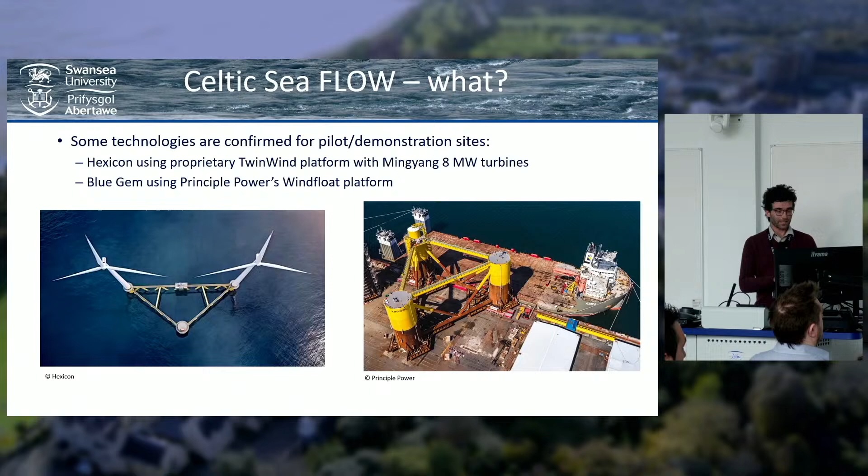However, most developers haven't confirmed their technology, with some caveats about levels of confirmation. In many cases, they likely haven't even selected their platform or turbines, because the rate of development of these devices is very rapid, and people don't want to commit at this stage to something they'll be deploying in 10 years' time. However, roughly we can say the expected capacity will be turbines between 15 and 20 megawatts, of a max height of around 300 meters with a hub height of 150 to 180, and a platform width of about 50 meters.

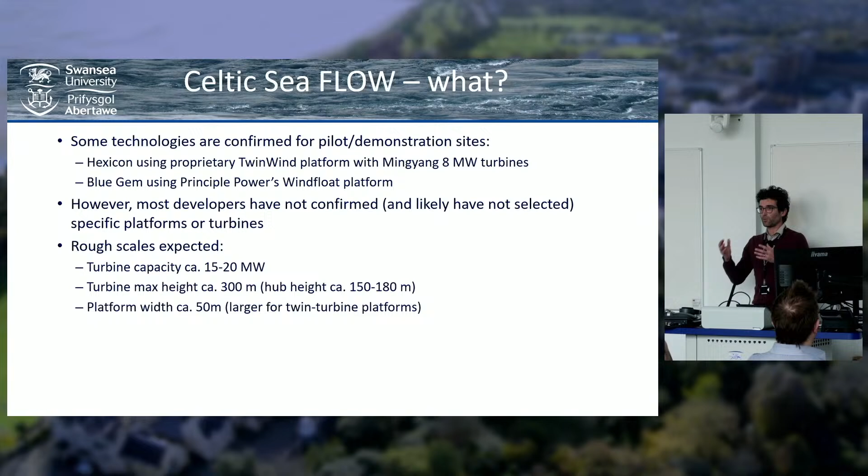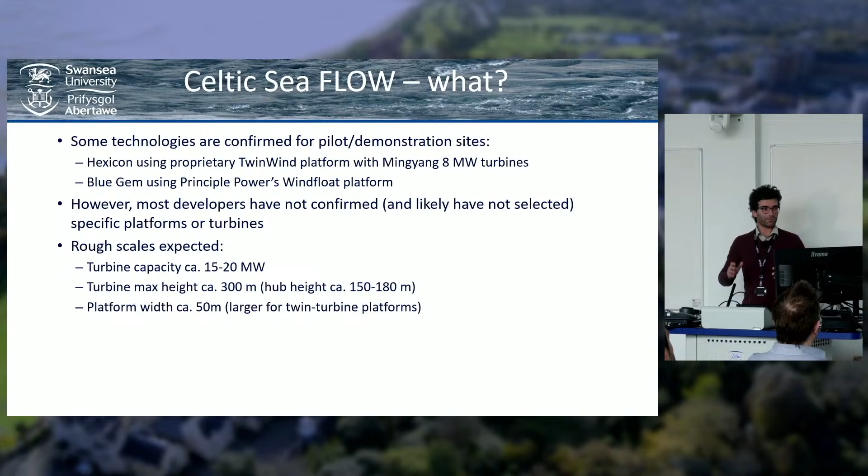The example that always springs to mind, given by RWE, is that it's the equivalent of building an Eiffel Tower on top of a Principality Stadium and floating it out to sea once a week for 5 years.

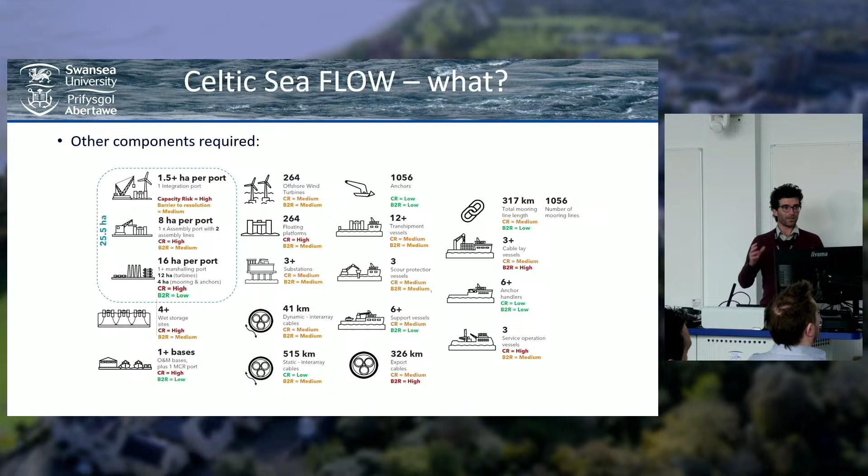Beyond the turbines and the platforms, there's lots of other components that are needed. Obviously the port facilities, storage facilities, the vessels, the cables, the anchors, the substations. So it's not just a matter of the big metal bits - there's lots of string that goes between them, and lots of places to store them when you're getting ready to tow them out.

How is it being supported? It's not expected they'll be able to sell at market parity, so they will be supported through probably the Contract for Difference scheme. I'll have to wrap this up now, apologies. Hexicon has already secured CfD funding, Contract for Difference funding, in 2022. No one else has yet.

However, we're expected to get more in the 2025 rounds. The 2025 rounds do include clean industry bonuses, which means the people awarded CFD will need to show engagement with local supply chains and more sustainable manufacture. I've mentioned the port facilities are going to need to be improved, and that's had some support - not just in the UK, but also in Ireland. So we're looking at South Wales, obviously, because that's where we are, but there might also be ports in southwest England and ports in Ireland, which might be the basis for some of this work.

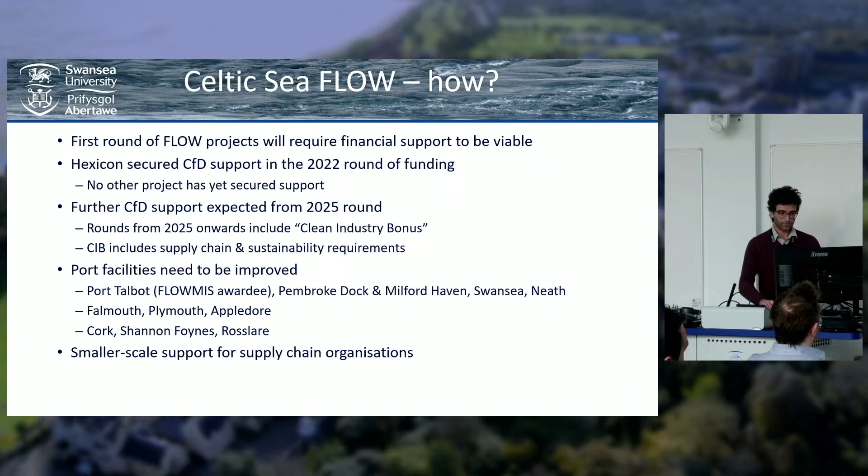And then we will return to the agenda because I've slightly overrun. Thank you very much.

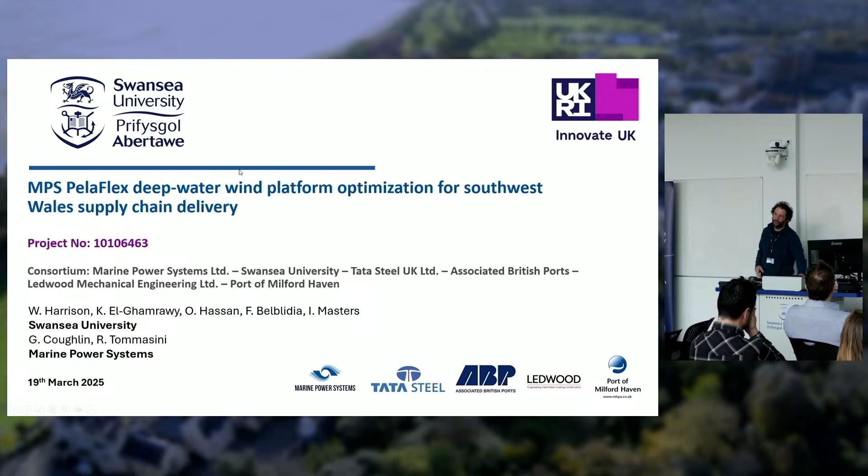Okay, thanks, Ian. So what I'm going to talk about today is a current Innovate UK project. This is a collaboration led by Marine Power Systems. We've got a few people from Marine Power Systems here today, with multiple partners, including Swansea Uni. So we're taking one of the technologies, one of the platforms that Michael just showed, and we're looking at optimizing that. There's a list of contributors - we've got contributors from Swansea University and from Marine Power Systems.

So, as Ian said, these things are really big. It's got a sort of tetragonal structure here. Some of these tubes are sort of 9 meters in diameter, so big structures. They currently have...

We need them to be able to preferably be made in the local area. So this project started with an initial design from Marine Power Systems. It's like a tetragonal shape. It's got advantages over some semi-sub designs. It has a low mass per megawatt.

Lots of similar parts, so it's sort of easy to manufacture. It's all steel, so it's recyclable. It's a towable structure, so it can be towed out easily, and it's fairly stable as well. Obviously, the more stable it is, the more steady your turbine is, the more efficient it will be.

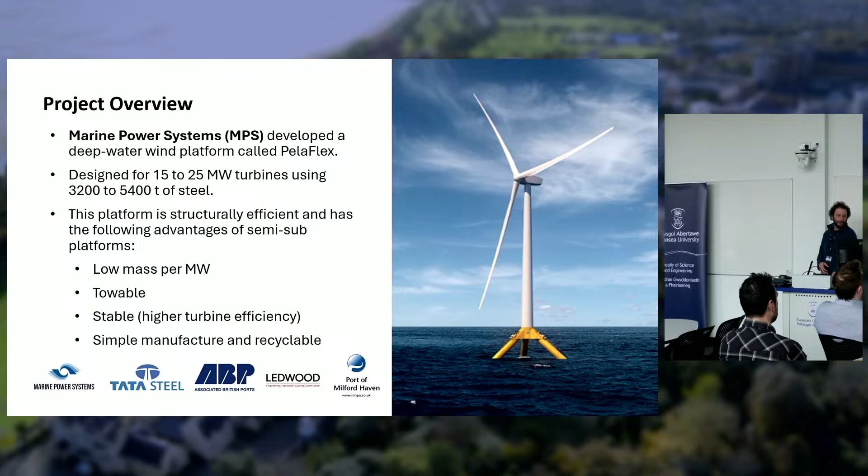So the problem with these structures is they're really big, but a lot of the steel in there is really thick. Tata, over in Port Talbot, can make steel sections up to about 20 mil. This has got sections way more than that, sort of 40 mil, 50 mil sections. So the idea of this project is, can we do some optimization of the design, reduce that section thickness down, make it so we can use the steel that we make in Southwest Wales, like over in Port Talbot.

If we're going to thicker sections, we're taking steel from somewhere like IJmuiden. If you're taking it from IJmuiden over in Holland, you might as well just make the things there and ship them over here. We're not going to benefit Southwest Wales.

This project is, like I said, a collaboration between Marine Power Systems and some partners. We've got Tata Steel, Associated British Ports, Ledwood for the manufacturing side, and Port of Milford Haven as well. One of the other advantages of this design is it's got lots of similar components in it, so it makes the assembly a little bit easier. You've just got multiple of the same part.

Okay, so I'm going to be talking about the design. Obviously, we want to optimize the design, so we need to go through the process. This is maybe targeted a little bit more for some of the academics here, what we're doing here. So first of all, we need to work out what the loads are on these structures.

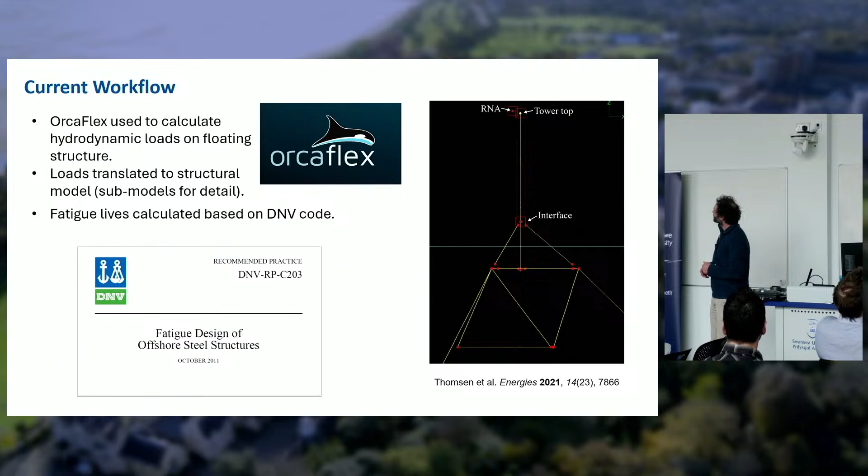We do a hydrodynamics model, we use Orcaflex for that. Those loads need to be then transferred to a structural model, so then we can calculate what the load cycles are and the fatigue life. These structures are going to be dominated by fatigue loading, and fatigue life is going to be our dominant factor there. And there's a code for offshore structures that we follow for that.

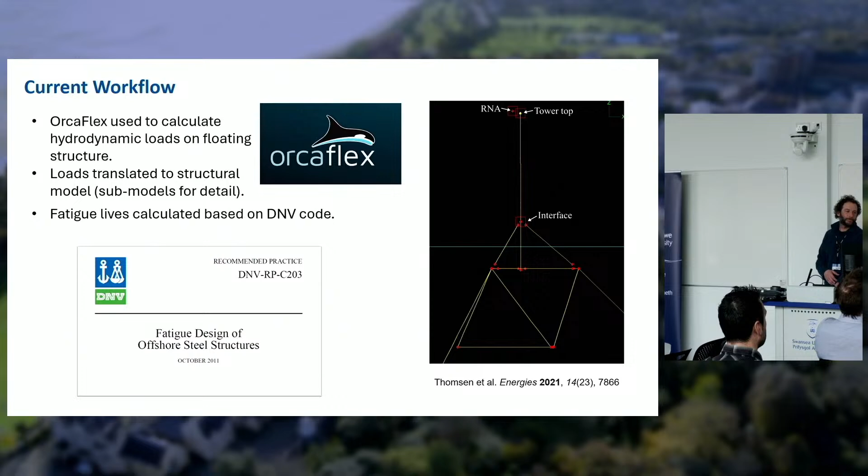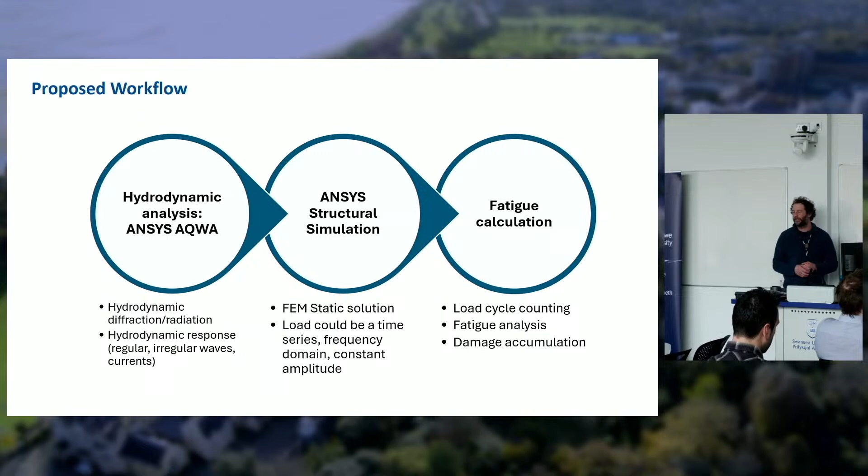So within the project, Swansea University's aim was to change the workflow. I'll suggest an alternative workflow we can use. Using the ANSYS environment, we can do the hydrodynamics in ANSYS AQWA. And then within the same environment, transfer the loads to structural analysis, and then we'd also do fatigue calculations as well, so accumulation of damage for the wave cycles.

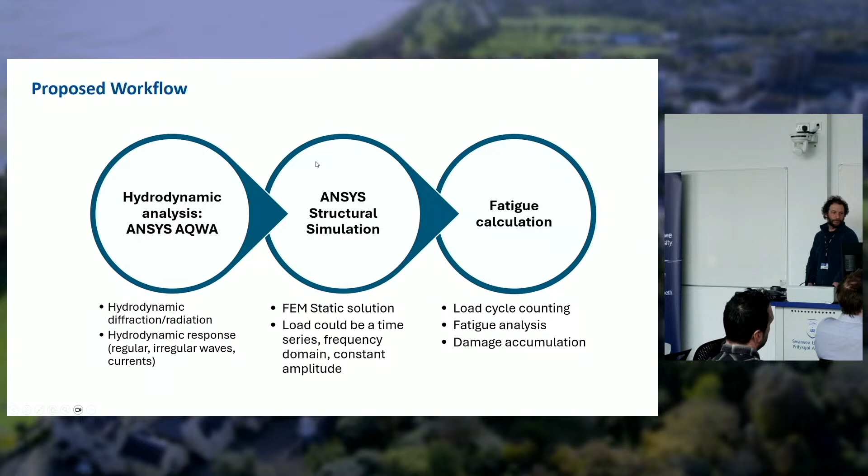And this is just an example of the workflow. I think some of the academics here will have used Workbench. So here, within the same workflow, we have the initial CAD model. Then we do some different load cases, and I'll talk about this.

So this is different wave conditions. Obviously, in the offshore environment, the sea conditions are never the same two days in a row, so we've got to have lots of different load cycles, wave conditions. Transfer those, then we're going to calculate the stress ranges for those load cycles, and then we can calculate fatigue lives. So this is basically for 6 different sea states.

So the advantage of bringing it all into one workflow is that we can help with the optimization. Change, for example, the CAD model at the beginning, and we can bring it all the way through and calculate fatigue life in one process.

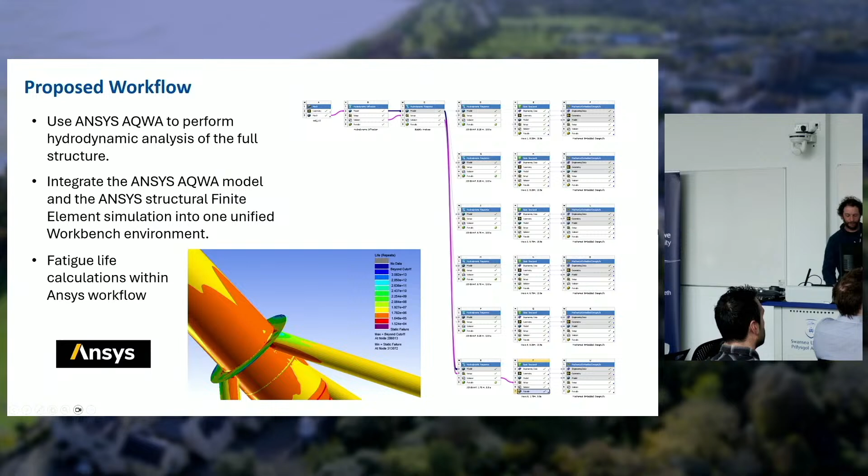All right, there's lots of challenges to doing this. For those of you who aren't familiar with offshore structures, obviously you've got to consider the waves, regular versus irregular waves. You've got all the hydrodynamic forces on a structure. You've got to transfer those loads from a hydrodynamic model to a structural model to calculate your stresses. Another challenge in this project is just getting a suitable CAD model to do the analysis in the first place.

Different constraints and contacts - you've got contact between parts, whether they're welded or however they're attached. Constraints such as: it's a floating structure, it's free to move, so you need to have a model constrained somehow. So for constraint methods, we use a 3-2-1 method.

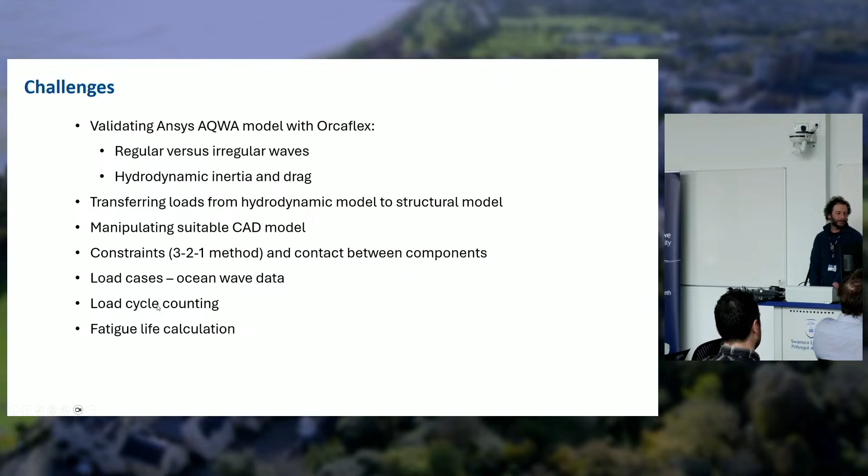I can talk a little bit more about load cases in a moment. Obviously, the sea is different all the time, so we can have lots of different wave conditions, with irregular cycles, so load cycle counting for our fatigue calcs is a challenge. And that leads us on to fatigue life calcs.

So we need some way of sampling this data to get a representation so we can get an accurate life for a structure without having to run every single possible wave state.

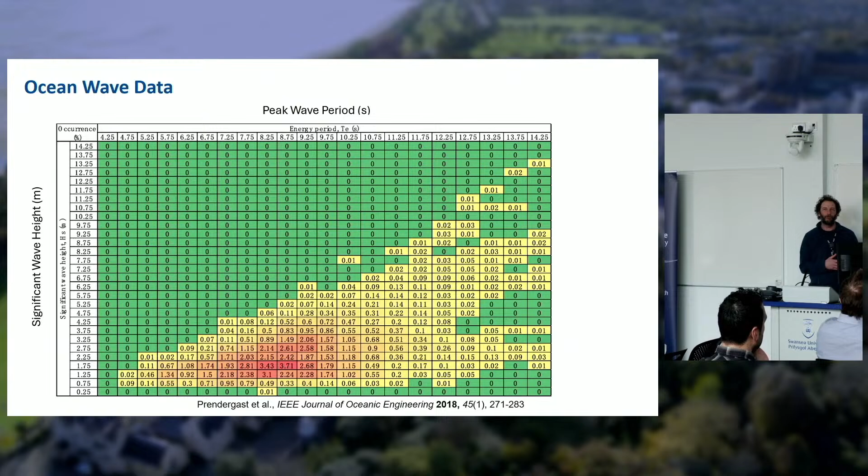Obviously within this as well, we've got wave height and period, but also the angle of the wave is going to affect it, so you may have a range of wave angles as well. So you've got a couple of ways we can sort of cluster the data. We can do just some non-physics based approach, so here we've got a k-means clustering process.

So we've taken the whole spectrum of wave data using a k-means algorithm to just separate it up into different clusters. We then take the mean of each of these clusters, and then we can run points here - each of these would be 12 runs to represent all that data.

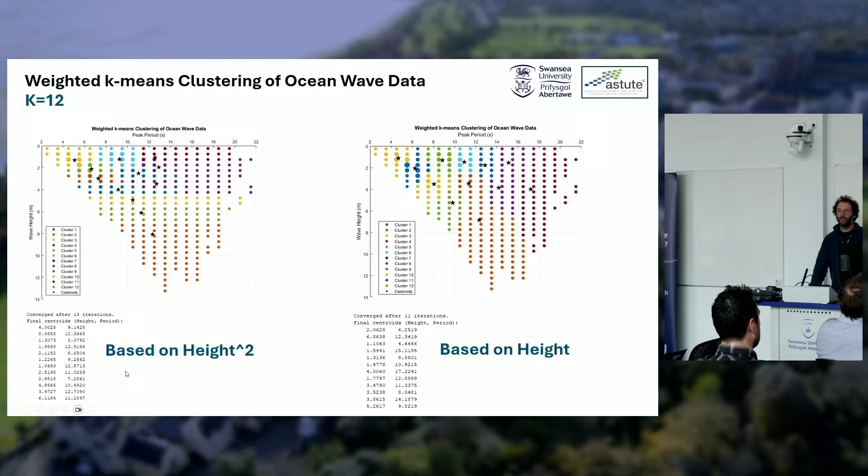We can do that based on height, or height squared we've got here, because wave power is dependent on height squared - significant wave height squared. So that's one possible way we've got to do this.

Another way is to take some points and find out really what's going on - more of a sampling based on understanding how wave height affects it. So we could do it almost like a response surface way through all the data, so we can sample all our different wave states that way.

So that's the challenge of looking at wave data. For those of you who do normal engineering, not offshore engineering, your load cases are nicely defined normally - you'll have a frequency and a stress range. Here we've got all sorts of frequencies and all sorts of stress ranges.

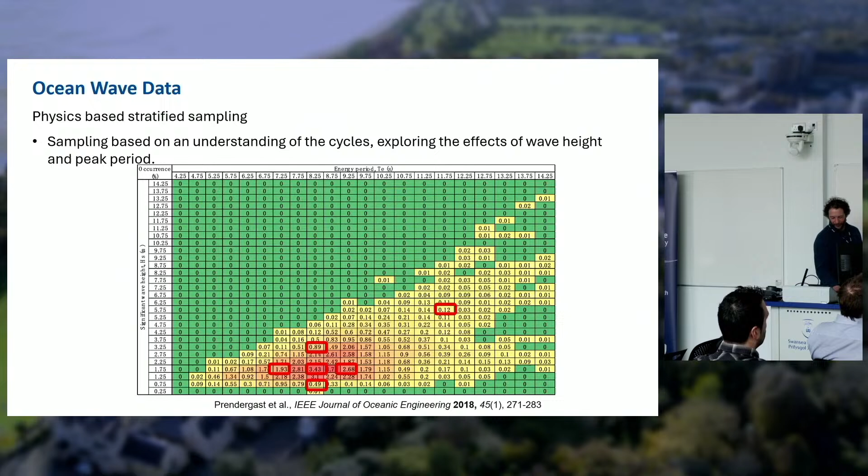We have a code to work from, so when we do our calcs there's all sorts of considerations - I'll go into a bit of detail here. Things like SN curves for our fatigue life for steel. This is steel in salt water with cathodic protection, and we've got within the code how to account for stress concentration factors, how to account for welds, how to account for mean stress effects.

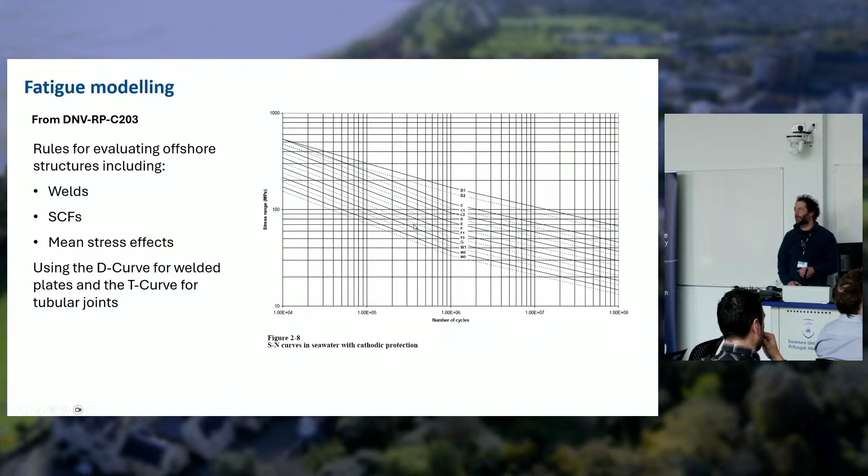So we have SN curves we can work from, but the challenge now is how we count our cycles. The SN curves will give us a life for a given stress range, but we've got wave conditions, and waves are irregular, so we don't have a nice cycle to count. So we take our hydrodynamic response, we then work out our static structural stresses, and for each point we'll have a nice cycle, but it's not going to be regular.

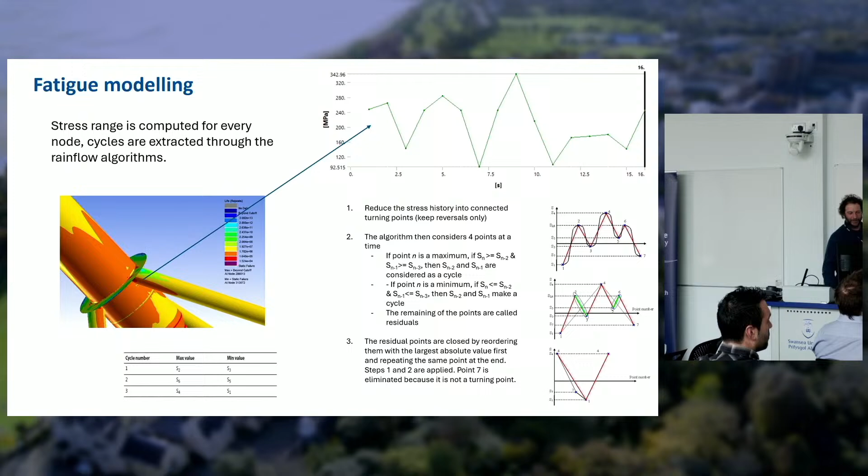We've got a nice irregular structure there. So we do some what we call rain flow counting, so we can count our cycles that way. But each cycle is going to have a different stress range, so that makes fatigue life calculations a little bit challenging, and what you end up with is something more like this.

So then we use that - we can evaluate our fatigue lives for these points and then work out our damage. And then we sum our damage together, with a Miner's rule.

So yeah, lots of challenges to evaluating offshore structures. Hopefully that gives you a bit of a guide of what we're looking at. I hope I kept to time there. So a bit of a summary: yes, there's lots of challenges to modelling an offshore environment.

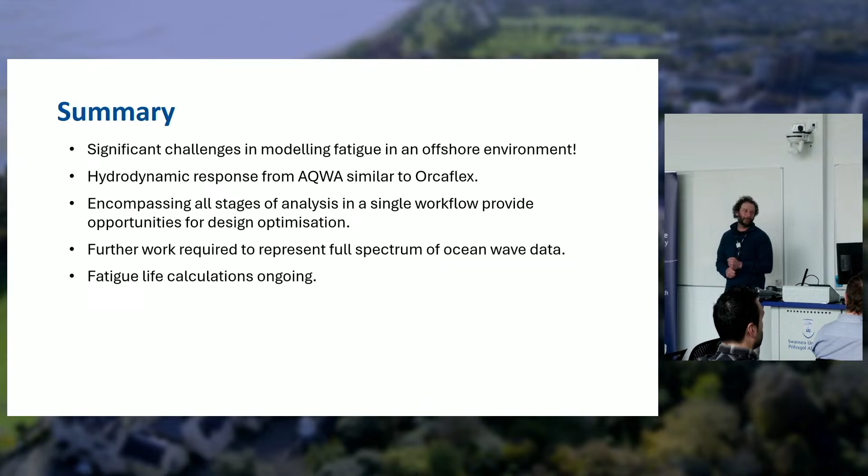We've done some work and we can get ANSYS AQWA to produce similar results to Orcaflex, which is an industrial standard. And other work I presented is ongoing at the moment. Anyone any questions?

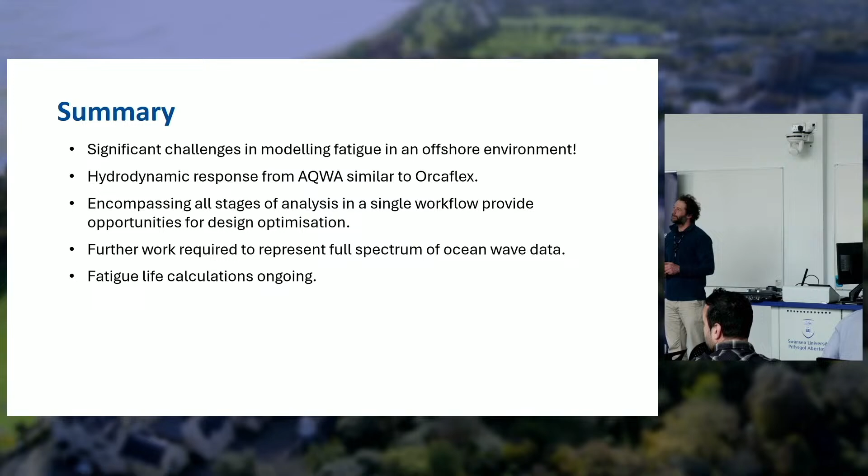Yes, Paul. Can I ask, it might be a very beginner's question - the idea of the turbine is that it also takes energy from the wind. Is that insignificant compared to the energy in the waves and the period of the waves? Or do you have to think about it if it's turning a lot when you're doing this stuff? No, there is a drag on it. So obviously, apart from that, it's considered, but it doesn't go into the fatigue calc. So the inertia of it is there in the structure moving in the sea, but that's it.

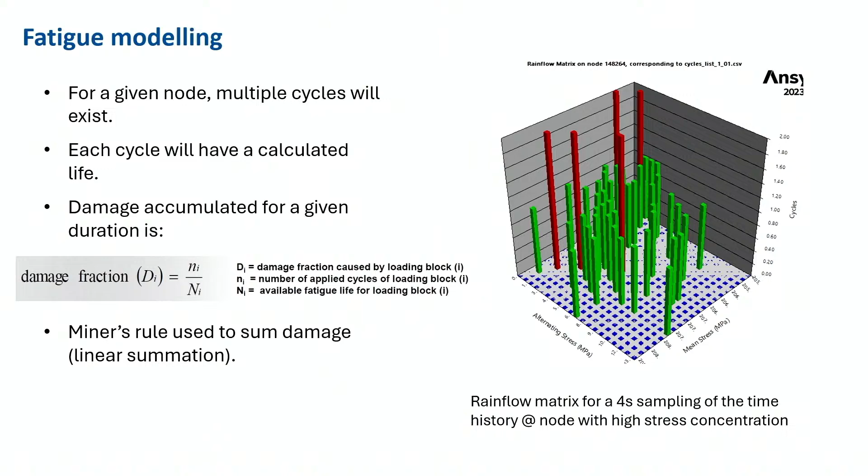Okay, so we've gone from one very technical thing to now a broad overview. Dawn, if you want to come up and talk to us. Dawn and Larry, who've organised today, so thanks to them for doing all the organisation and the logistics, have been talking to a number of companies locally, and Dawn is going to summarise what they've been up to. So you need to read that.

I thought he was going to say we've moved from one very technical thing to one not very technical thing, but we'll ignore that implication. So we've been working for the last 15 months on this project called NPT-FLOWRD. Michael's leading it, and Larry and I are the researchers on the project. Basically what we have tried to do is engage with companies in Neath Port Talbot to see opportunities in the supply chain for floating wind, for the floating wind sector. So this is the sort of remit of the funding that we had - we had a year's worth of money coming down from the government through Neath Port Talbot, through the Levelling Up funds.

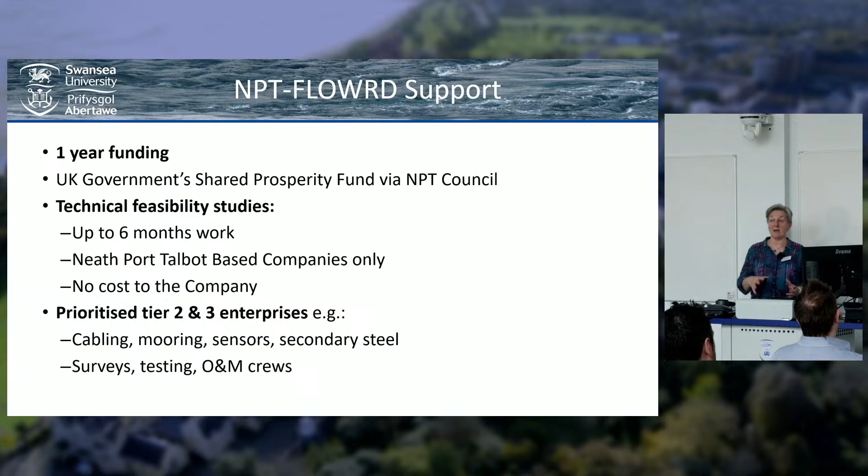And what we were offering to companies is technical feasibility studies at no cost to the company, where we would say, okay, we can do some work for you, between about a month or six months of work, looking to see where there are opportunities, particularly relating to your sector. Neath Port Talbot business unit were dealing with the metal bashers, and we were looking at the sort of second and third tier companies who would be able to engage in ancillary equipment and other areas relating to the sector.

So what were we actually doing? Hunting around really and drawing together information from all sorts of sources. There's a lot of stuff out there, but mostly small businesses haven't got time to delve around in what's available. So Michael's mentioned the Crown Estate - we had the opportunity to speak to CADU. There's the Offshore Renewables Catapult, and people are publishing reports - you've seen this table earlier, publishing reports about detailed requirements that are needed. And also some of the existing data that comes from wind farms that are under development, in this case Dogger Bank. And then, of course, we're involved in academics, so we're looking at published literature.

But this was all about searching websites and drawing that information together in a way that would be easily accessible for the companies. So we worked with 11 companies. I'm going to try and give you - I was thinking, oh, I'll only talk about the odd one or two. And then I'm like, oh, they're all so different.

I want to tell you what we've been up to. So I've sort of grouped them.

Here's a group of three companies who were particularly interested in who the developers are likely to be working in this area. We've got 9 Training, who do apprenticeship-type work, CAD, and management training, so very interested to see what opportunities may be there.

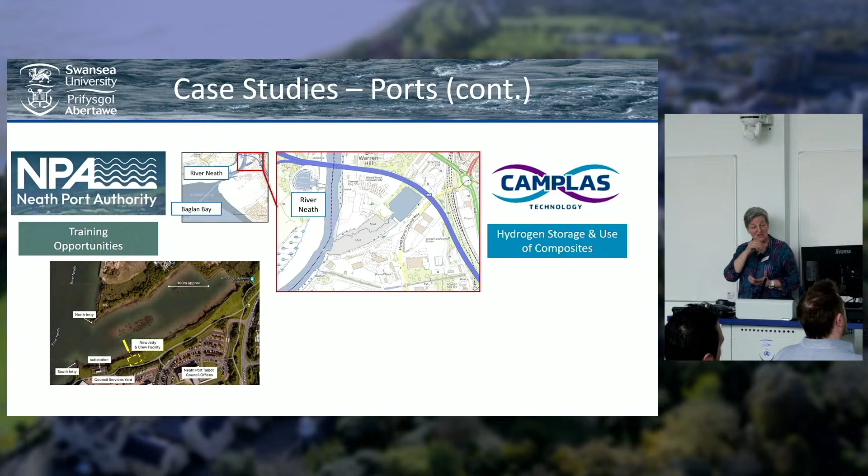So we worked with Neath Port Authority to look at a small port on the River Neath. It's disused now, has been since the 1960s. It's known as the Briton Ferry Dock or Brunel Dock, because the lock gates there were designed by Isambard Kingdom Brunel.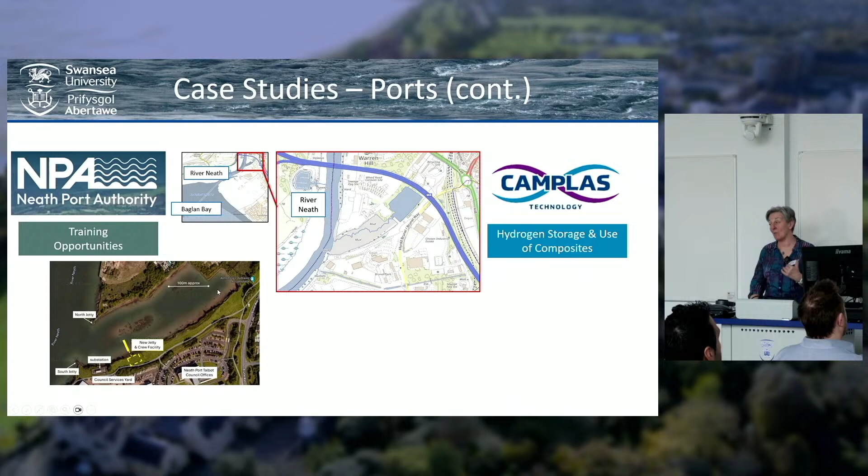If you're driving from the M4 coming towards Swansea and you look down, you can see it. We did some work looking at whether there were opportunities that could be developed, for instance, for crew transfer vessels.

But because it's got that link with Isambard Kingdom Brunel, it's got listed building status and scheduled monument status. So their technical feasibility study also included conversations with CADW about where the restrictions and opportunities might lie.

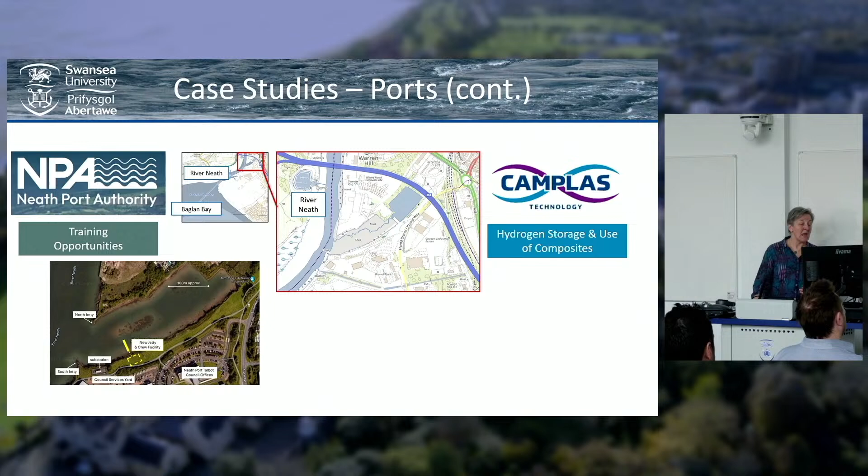Another company interested in the same area is Camplas Technology - they're a Bridgend-based company but have land located in this area at the moment. Their feasibility study was not only about how they might use their glass fibre storage tank manufacturing, but how they might use glass fibre in floating wind turbines. They had an interest in how towers have been built out of glass fibre, and also looked at hydrogen storage.

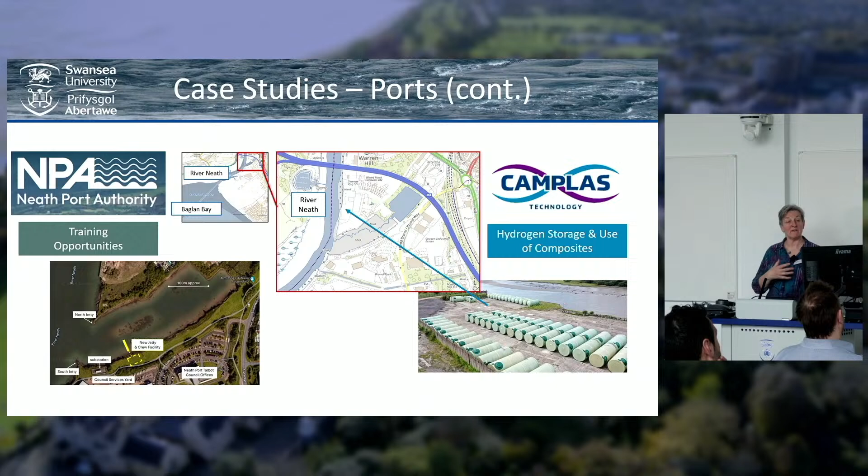As an aside, many of you will have heard of the Celtic Freeport, which enables the ports of Milford Haven and Port Talbot to have some tax and import exemptions. This area here, where Camplas has their location, has also been designated within that area for the Celtic Freeport. So it's very interesting to see how those things are moving along.

Lastly, these four companies - basically their focus was related to the turbines themselves. Talk to me later, I'll happily talk to you about toilets in turbines.

GenQuip produce welfare units - the sort of thing you'll see on building sites, with toilets, showers, canteens. Their technical feasibility study looked at how they might be able to use their experience for installations of toilets in towers, which we have seen done retrospectively in some locations.

The case study for Hexigone was slightly different, in that we were able to use other resources in the university, in the Welsh Centre for Printing and Coating, and they were able to look at the feasibility of a new corrosion inhibitor and whether there was an opportunity there.

CommSpec, I'll just quickly mention - I think they're a fine example of how we could do for them what they couldn't do for themselves. They're a sole trader, and the technical feasibility study was looking at what might be suitable signals that could be used between wind turbines on the wind farm so that data could be collected there and then sent back to shore. This was work that we could do that they generally wouldn't have had time for.

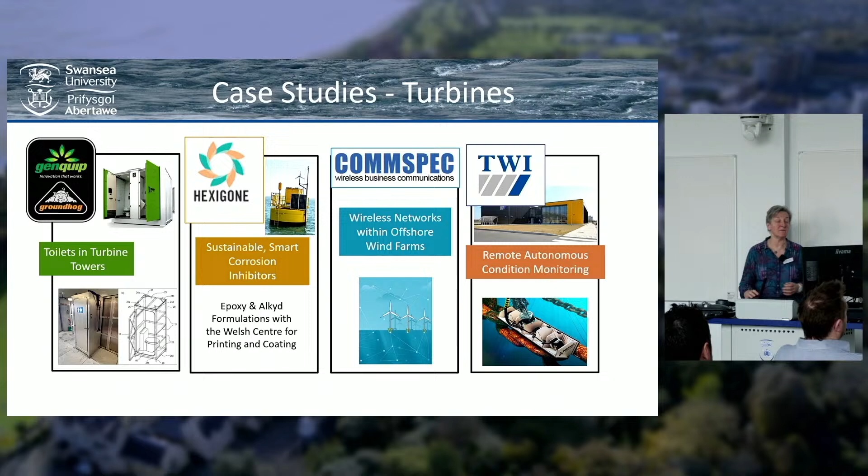TWI were very interested in who the developers were to see who they could work with, but also interested in remote systems for inspection - whether that was robots underwater looking at cable inspections, but also the sort of blade crawling inspections. In fact, we've had discussions with them more recently where they're looking for funding so they can work with local companies and see how they can move that along and test and facilitate what is available.

So what have we accomplished? A quick summary: we've done 11 feasibility study reports. We held an event at the Towers Hotel to engage with local companies. We also brought in some students from Neath Port Talbot, and they were introduced to the sort of things we're doing and other connected projects within the university. We've reached more than 100 people, and we've also helped businesses to be able to engage in R&D and move forward in innovation. Considering this has only been a 15-month project, we certainly feel like there's been some interesting work, and hopefully this has been of help to local companies in Neath Port Talbot.

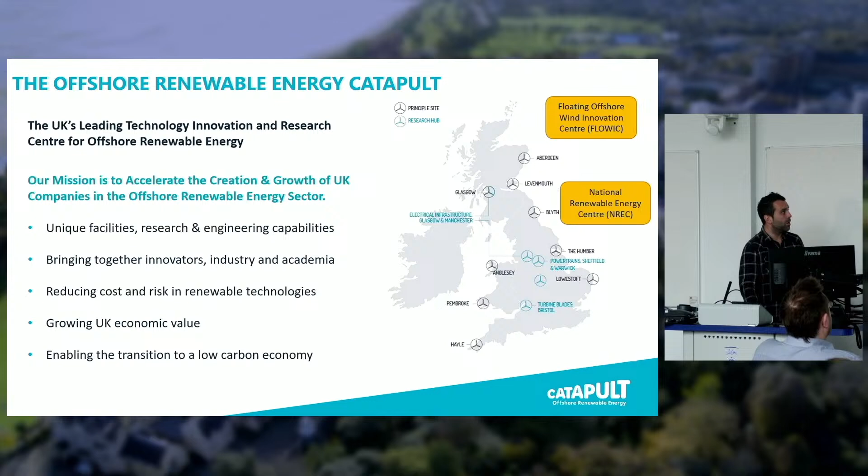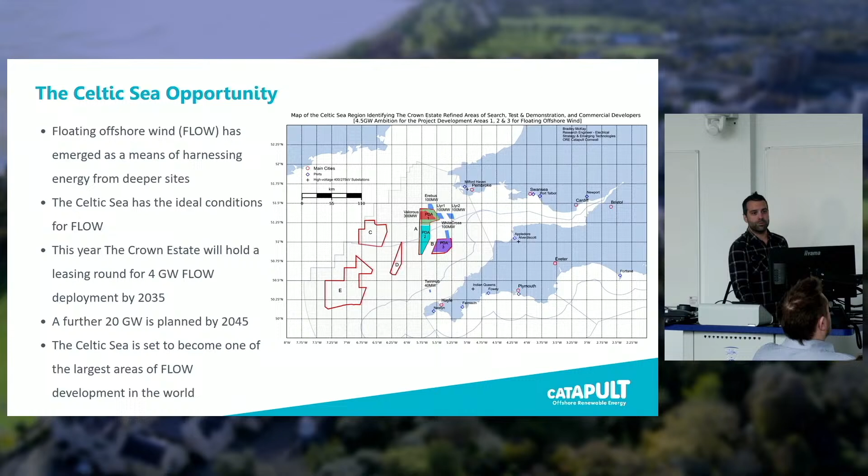So the Celtic Sea opportunity - not to repeat what everyone said already, but basically the Celtic Sea has got ideal conditions for floating offshore wind. It's a very deep site, which means some of the fixed turbines are not viable anymore, so it's a great opportunity for floating offshore wind. This year we got the leasing round for 4 gigawatts in floating offshore wind to be deployed by 2035. A further 20 gigawatts are planned for 2045. This has the potential for the Celtic Sea to become one of the largest areas of floating offshore wind in the world, actually.

Floating offshore wind, why? I just mentioned that the turbines are going further offshore, which means deeper waters. There's still a trade-off to be decided. There's a lot of discussion about what is feasible for fixed platforms or when floating is more viable, but we all agree there is a certain depth beyond which fixed is not viable anymore, so we have to commit to floating.

There are a lot of lessons learned from the oil and gas industry for using platforms. They've been using them for years and years, but we have to bear in mind that floating offshore wind needs to be cheaper, more efficient, reliable and manufacturable, so not all the lessons from oil and gas are applicable here. One example is the moorings - they used to over-dimension them a lot, using chains that are very heavy and produce a lot of noise, which would affect marine life. So you have to move away from some of those lessons learned from oil and gas and apply them particularly for floating offshore wind.

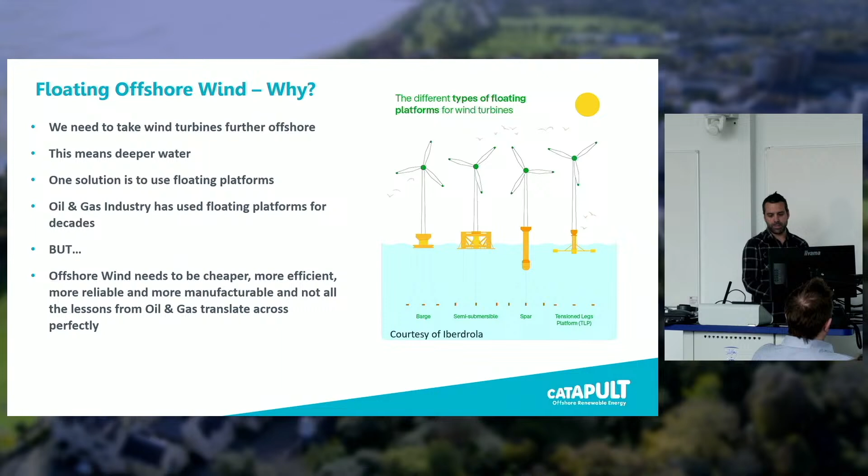As I mentioned, we've got the potential of delivering up to 24 gigawatts in the Celtic Sea. The first turbines installed there would potentially be very different from the last - the last 100 megawatts will be completely different from the first. Instead of just a big number of turbines, it could be a single massive wind turbine, or a multi-rotor system, which means there's a lot of opportunity and scope for innovation and research and development in this particular case.

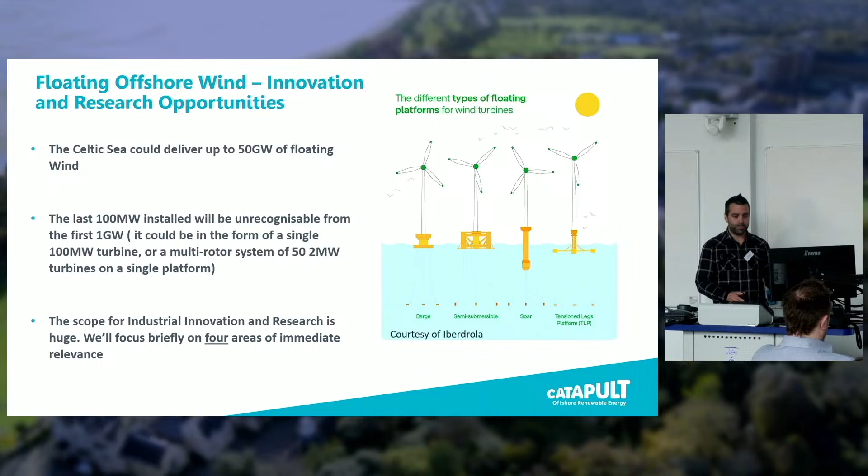So we're going to mention four main areas of focus, or challenges.

The first one is dynamic cables. For fixed offshore wind it's already a massive issue - cable failures cause 80% of insurance claims. For all the viability studies and financials for getting offshore wind developed, it will be even worse because it's much more dynamic - there's much more stress, much more fatigue, and it's a very unknown field at the moment with floating platforms. So there's a need for a lot of innovation in elements like bend stiffeners or new cable materials, and further studies about fatigue life. It's important to pay a lot of attention to condition monitoring, to be able to detect early before failure and act upon it. This is an important challenge overall for offshore wind.

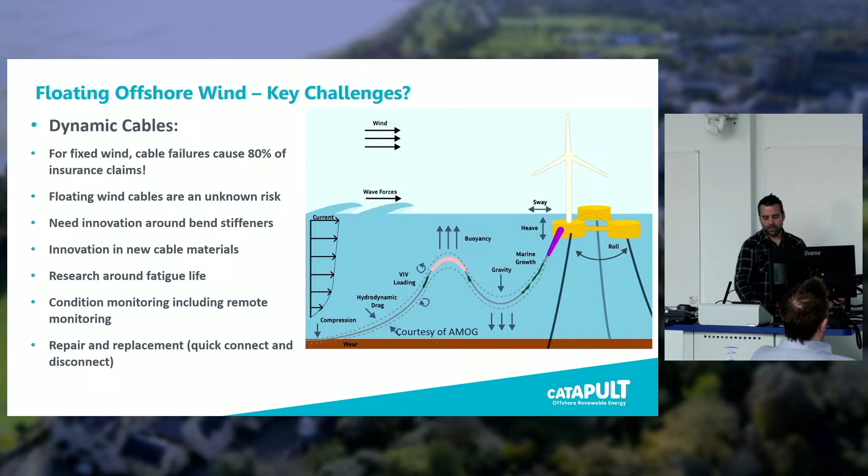Another example is the repair and replacement of these cables. An option would be to have lengths that could be substituted easily, so when part of the cable fails, it's much easier to act upon rather than spending hours and hours of time just locating it.

The second challenge we'll talk about is moorings. I mentioned briefly before about oil and gas, but basically, if we rely on oil and gas learnings and approaches, there's not enough chain manufacturing in the world to supply these big projects from the Celtic Sea. So we need to move away from some of those. There's potential in materials such as synthetic ropes, and designs for what they call intelligent mooring systems that can absorb peak loads, because peak loads are the biggest issue for the life cycle of moorings. We need systems able to absorb that kind of impact. And not only that, there's also the noise these farms will generate in the area, affecting marine mammals and marine life, so we have to take that into account when designing the moorings for floating offshore wind.

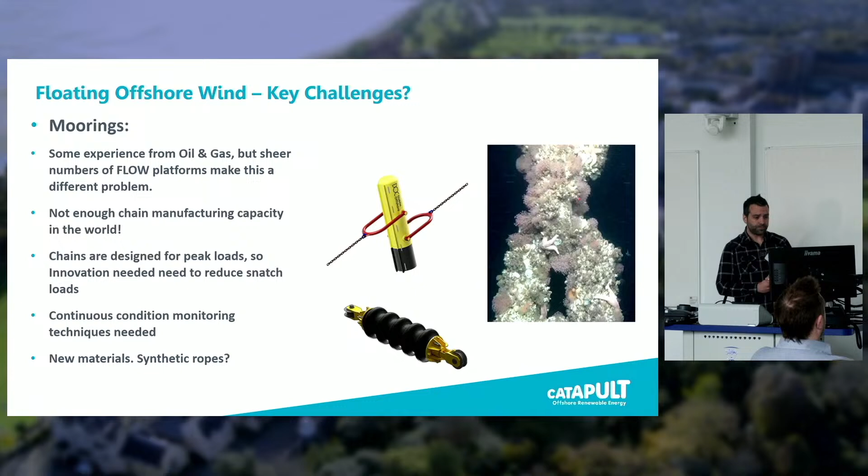Moving on to the third challenge: operations and maintenance.

Fixed wind relies on crew and component transfer from floating vessels to fixed platforms. Now they're not jumping from a mobile boat to a fixed platform, but going from a mobile floating boat to a floating platform, which adds a lot of complexity to those operations, and it's always considered a big risk. The plan is to move away - not completely eliminate, because that would be impossible - but to minimize the number and duration of operations offshore. We basically need to remove the human factor if possible. There's a lot of innovation around survey drones and autonomous underwater vehicles, but we have to bear in mind their limitations too. For example, for drones, the biggest issue is the wind they can tolerate to operate properly, and since we're talking about offshore wind, it has to be windy to be viable.

So there's a lot of limitations we have to bear in mind when designing these systems. But that is basically what we're talking about. Another important bit is the communications.

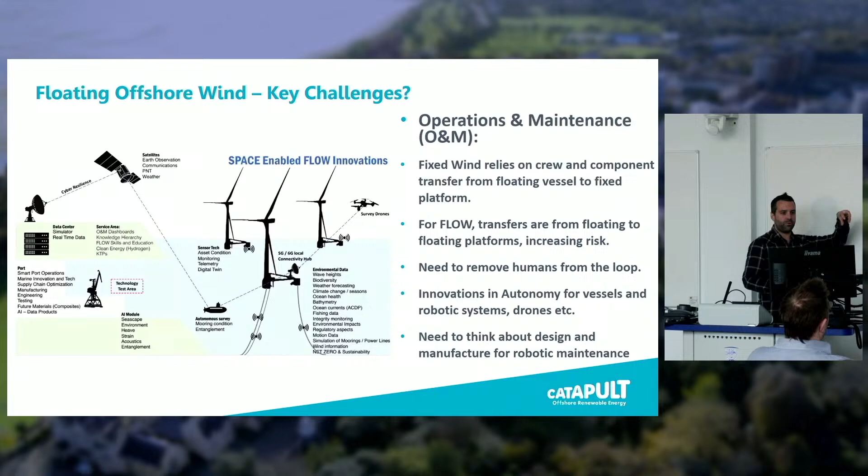There's some projects already looking at using 4G, 5G satellite communications to provide the data, but we still have the big issue, if we've got seabed or underwater systems, there's a lack of bandwidth. So we struggle to have enough data transferred to those 4G, 5G satellite points. That's one of the bottlenecks there.

So the last of the challenges is environmental monitoring. It's a subject big enough to have an entire event around it. But there is a lot of new technologies we have to develop for this, for offshore, floating offshore wind.

A lot of the current approaches are point measurements that might not provide enough information of the whole area. So we're trying to move into regional approaches rather than point or precise tiny areas, doing more of a holistic approach. We also need long-term monitoring as well, not just for 1 month or a couple of months a year.

There's a lot of variability in the ocean we have to take into account. So we're moving into systems able to be deployed long-term and account for not only seasonality, but also what happens through the years. And it's not only for the planning and pre-deployment, it's also installation and post-installation times. So we need robust systems that are able to collect data for the long term.

So that's pretty much the 4 key challenges that we see that are going to be in the Celtic Sea in the future. Just to mention some of the projects that we're involved with along these lines...

We've got the Rescue Project, which stands for Regulations to Ensure Sustainability, Circular use and End of Life for Wind. It's a comprehensive and robust end of life materials handling network. We've already identified more than 150 policies and regulations that could be applied to UK wind turbine end of use management. So we're talking about not only the installation and operation, but we have to think about the end of life of these farms.

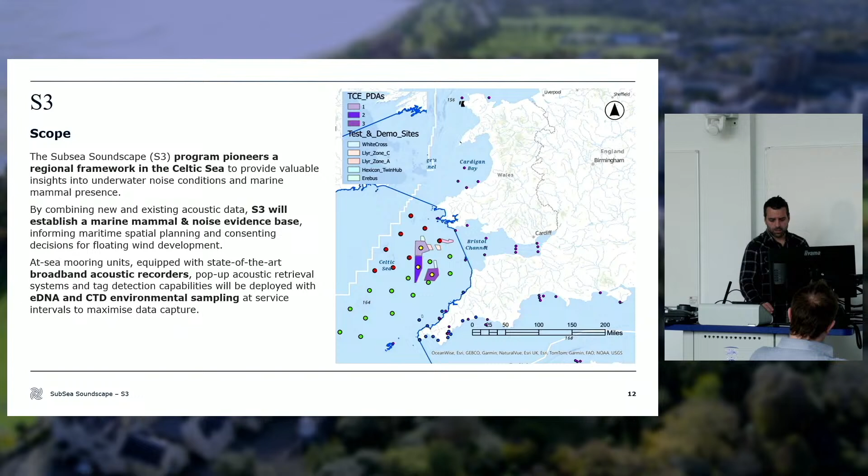So it's not only collecting acoustic data for the long term, but we're also doing eDNA sampling during any of the maintenance operations we're doing, and CTD sampling as well. So that's the end of my presentation. Happy to take any questions.

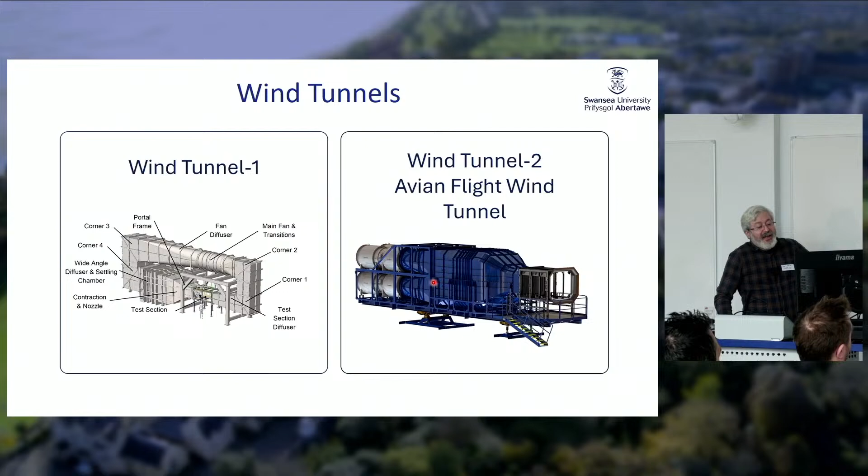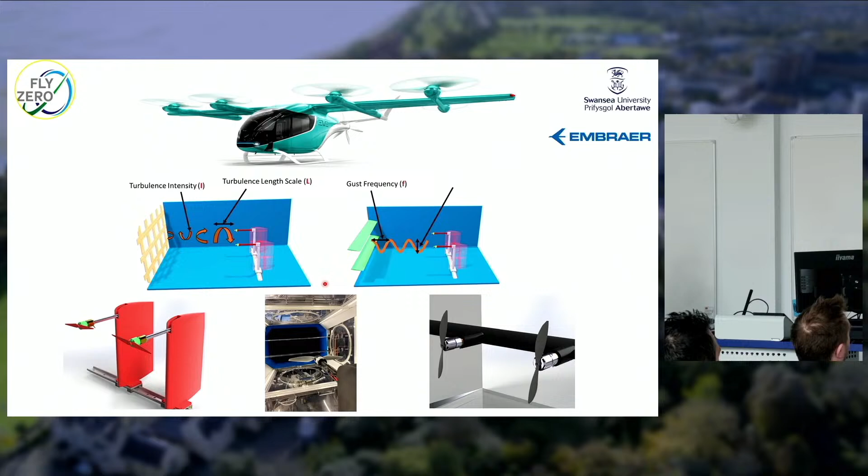All of my work with my PhD students is about gust and turbulence interaction. I started working on this topic for the last 2-3 years. All the experiments we did before were always in smooth flow conditions, but real life isn't like that. If you have a wind turbine, it's always exposed to gusts from the sides, or different levels of turbulence. If it's an aircraft, it's the same, and if it's a drone, it's the same. So with my students' projects, I'm trying to develop a knowledge base about how gust and turbulence interaction affects all these kinds of applications.

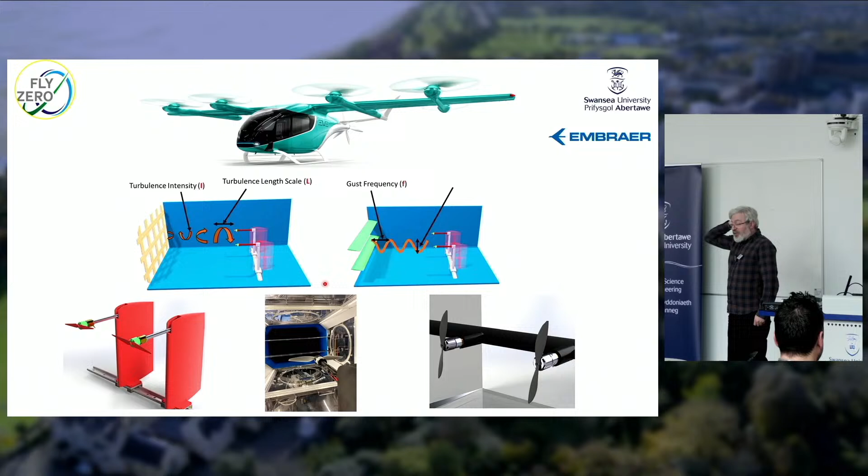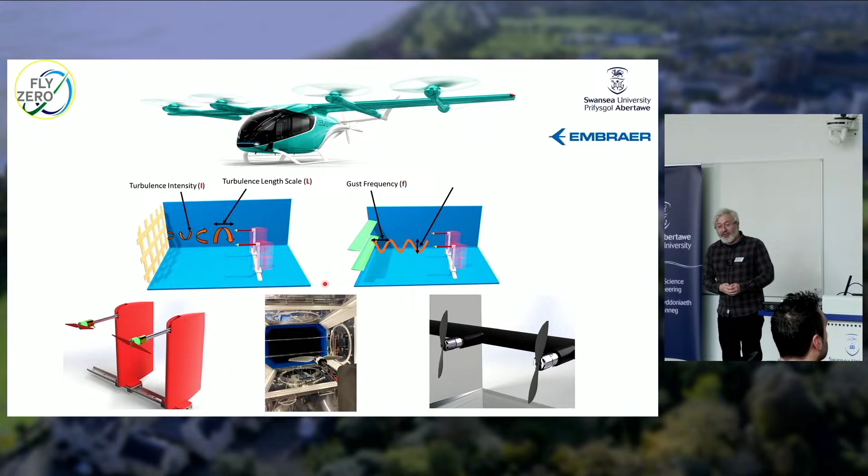The first application is urban air mobility vehicles. We are doing this with Embraer, the world's third largest aircraft manufacturer. This is about the flying taxi concept, which is all over the place now - Vertical, Joby, and lots of aviation companies are trying to build one. For net zero, the propellers or rotors are driven by electric batteries, and you can have multiple rotors or propellers, with every company having a different layout. We don't know how those rotors really interact with each other - their wakes hit each other and change each other's performance.

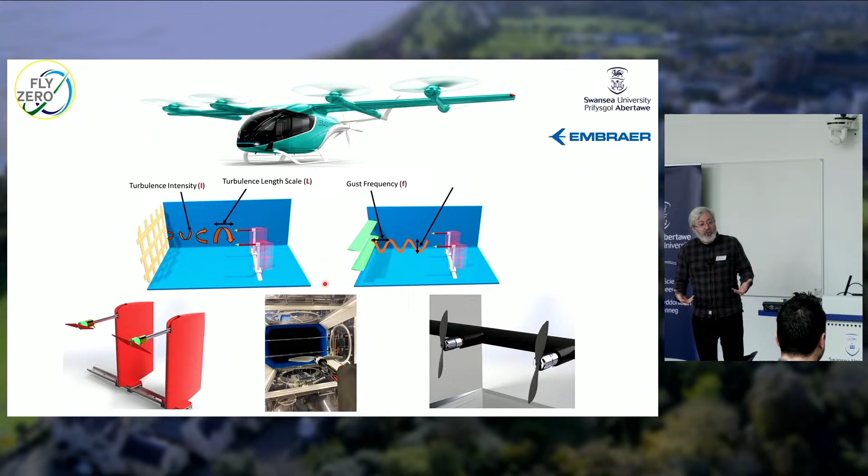In the worst case, we don't know how they will react under gust and turbulence when they take off or land. If you want to land here, there's a huge building there - it will have a wake, there will be a gust behind it, so we don't know what's happening. None of the companies know, so they're spending so much money on these research activities.

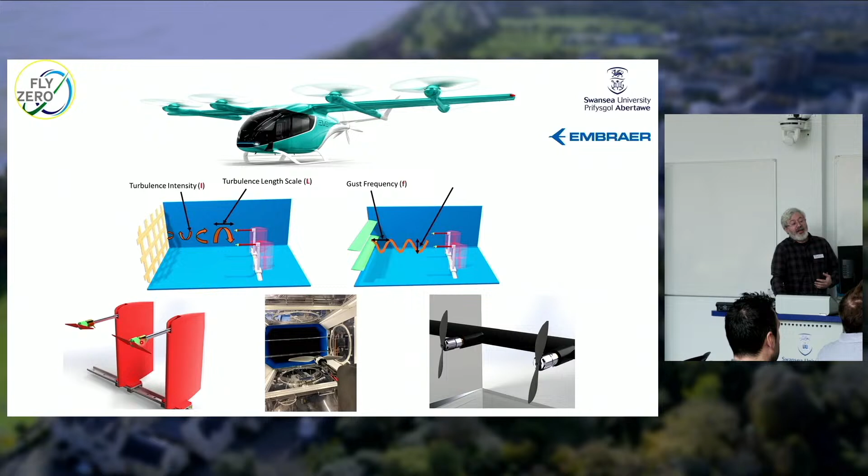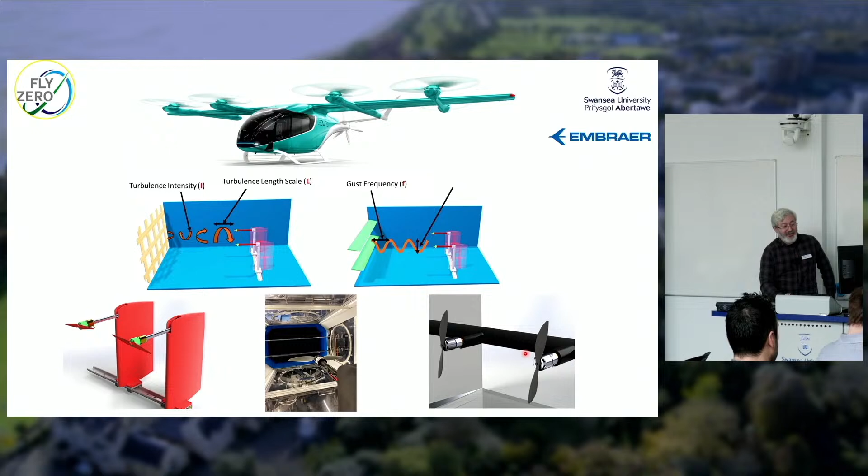This is what we are doing - you're seeing two rigs here. One of them is about rotor-rotor interaction, and there will be four of them in the end. We will be subjecting these to different gusts - a controlled sine wave, or homogeneous turbulence at different levels - and see how the propeller performances change. We will also install a wing and see what happens to the overall performance of the aircraft. We've started to do experiments, and we have the rig.

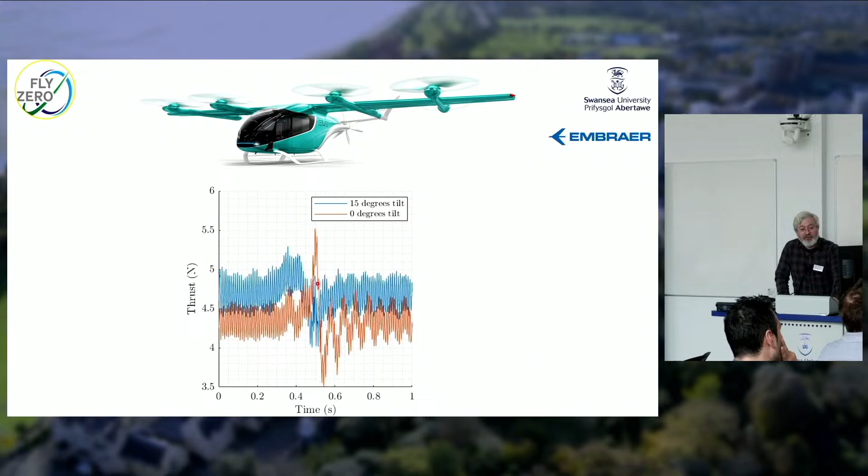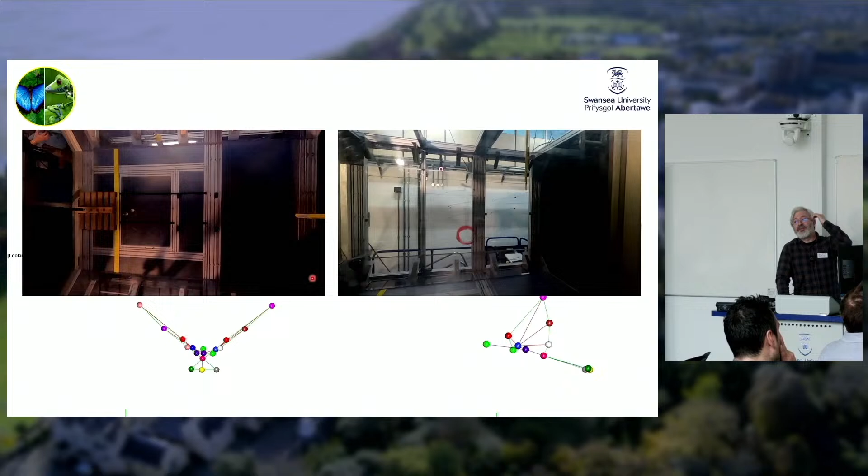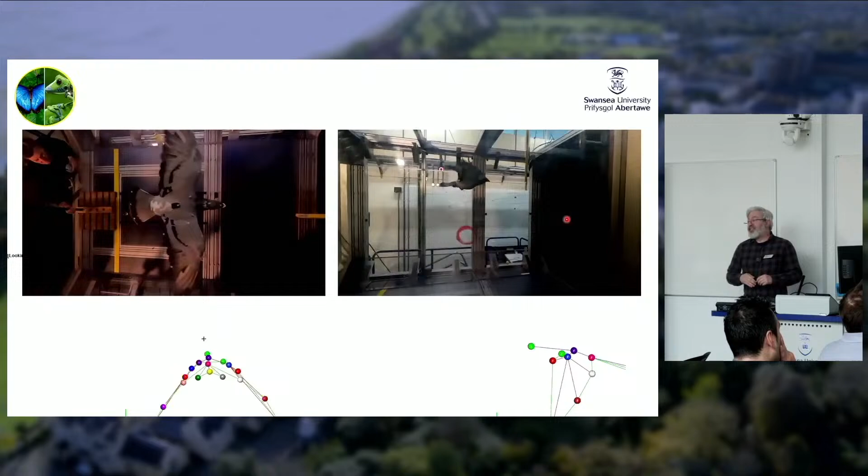So we do lots of biomimicry. As I said, I work on flow control, and I aim to develop flow control techniques based on bioinspiration. In our other internal facility, we have been doing experiments with pigeons. Now what you are seeing is a pigeon flying under gust. You don't see it, but there's a gust generator here, sending discrete or continuous gusts. That pigeon has lots of markers on it, you can see, and then we are just getting the whole kinematics of the bird.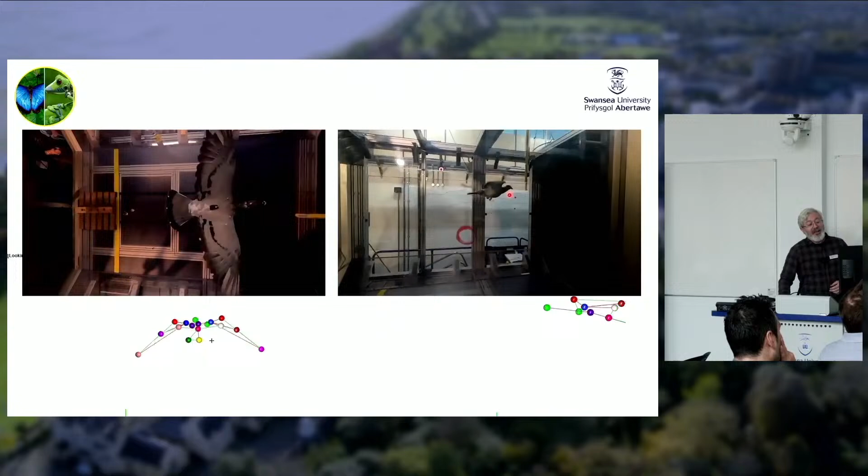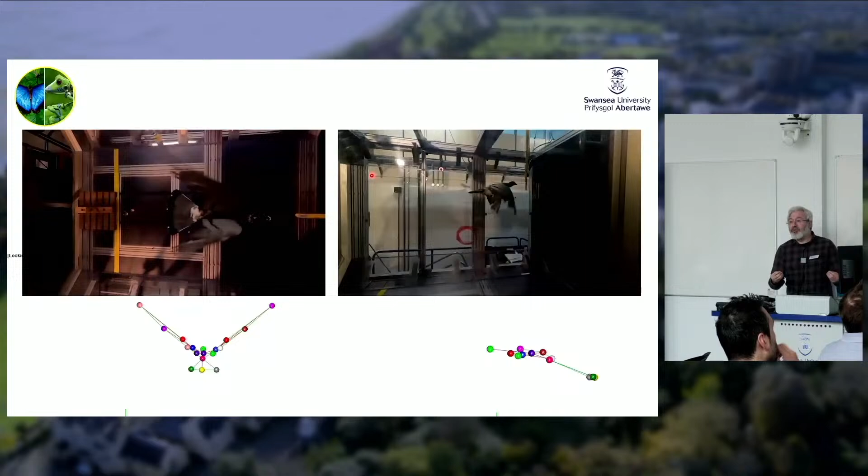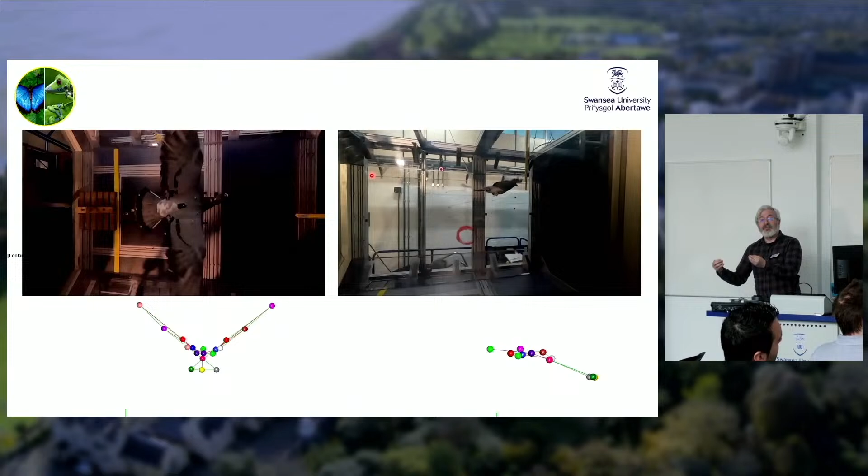There are two things we can do, just from a scientific point of view, on how these birds react to gusts and turbulence. Professor Shepard from Biosciences has already been working on pigeons in their natural habitat. Now we are doing experiments in the wind tunnels, and we are trying to understand how these match. But my aim is to learn from here and try to find a flow control technique to stabilize drones or other small MAVs that will be in use.

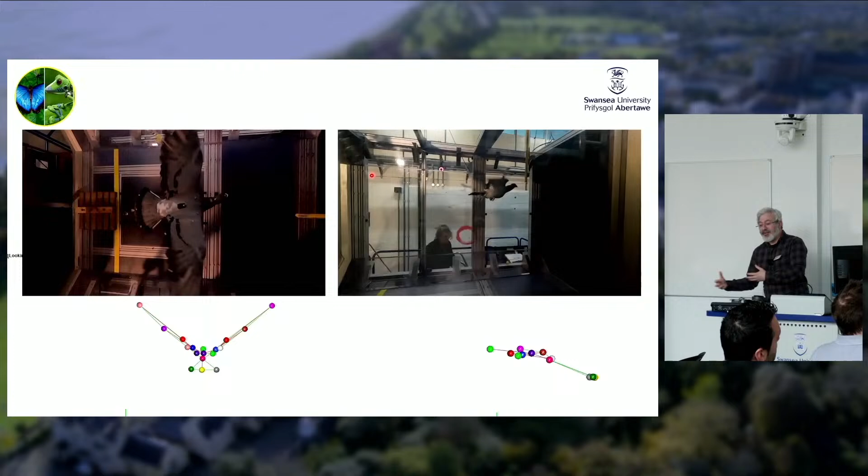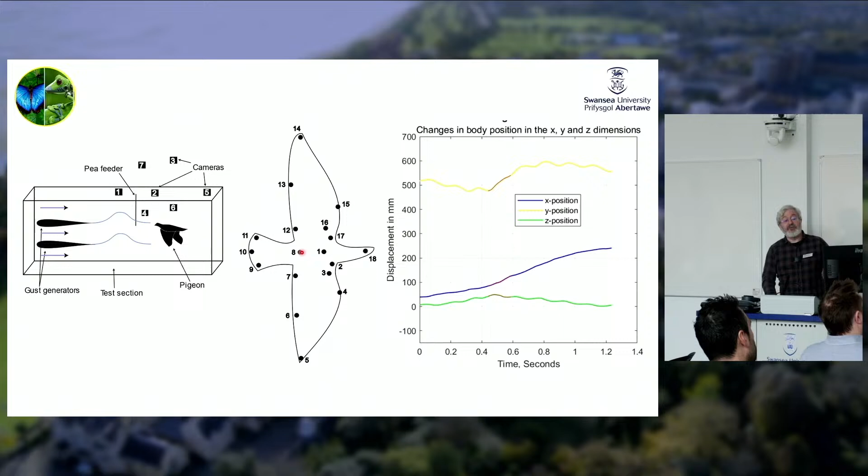Because if a pigeon can stabilize itself in, let's say, one flapping cycle, can we do it for a MAV or UAV? From here, what we do is simply get all these markers' locations, and then we can define anything we want on a pigeon: how much it rolls, how much it pitches, how the wing area changes, etc. And then you can do higher order analysis, calculate accelerations, how the wing accelerated or not. This is also new - we are trying to understand if we can figure out a flow control technique from here.

The last thing is more related to you guys - it's about wind turbines and wind turbine blades. Most of these projects were led by Ian Masters before. This is one of my students' projects. He was doing it from his 3rd year, and he's still continuing. This is about active control for a wind turbine blade, and luckily, one of the companies Ian was working with before, Anakata, has funded this project plus their own projects.

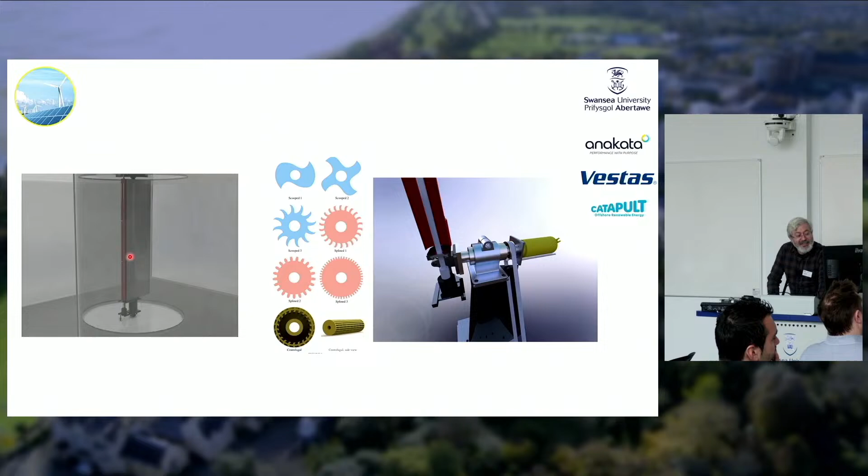And there are other studies that have been done in the wind tunnel facility. There was a project with Vestas - they have done a project about flatback airfoils, which is again used in wind turbine blades.

We are doing some other small projects. One of my colleagues had a project, indeed supported by ORE as well, and we are trying to figure out an experiment about how - so his project is about observing health monitoring for wind turbine blades with a drone, but to do that, you should keep your drone in a fixed position or in the same position relative to the blade. So we are trying to do a scaled experiment for this, which is not easy. We are thinking about it.

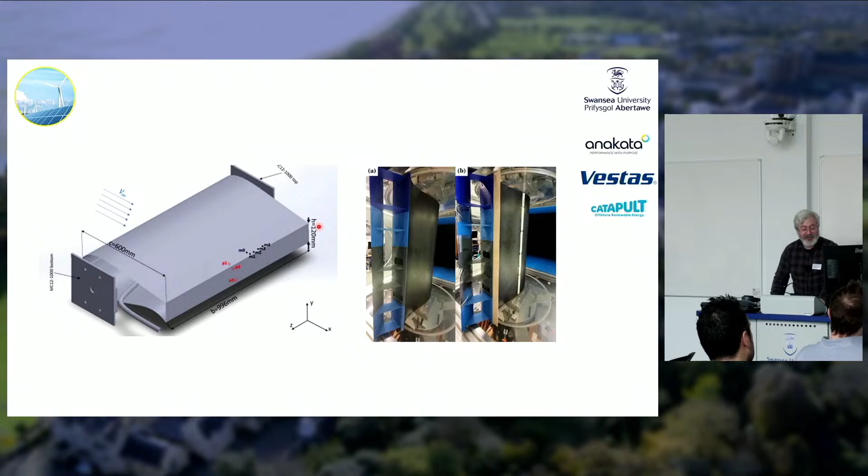Yeah, that's it. So this is just a general thing that we can do with wind turbines, and we are all doing these things with my students, which are great. So if you have any questions, I'm here to answer.

Okay, my colleague Dr. Alison Williams is leading our work on computational fluid dynamics of turbines, so I'm going to let her talk about that. Thank you. Okay, thank you.

Hello everyone. What I'm going to talk to you about today is the work we've been doing on building a computational model for arrays of turbines. This work has been led by myself and Ian, and has been going on for quite a few years, so it's been supported by a team of postdocs, so I'm just acknowledging them here.

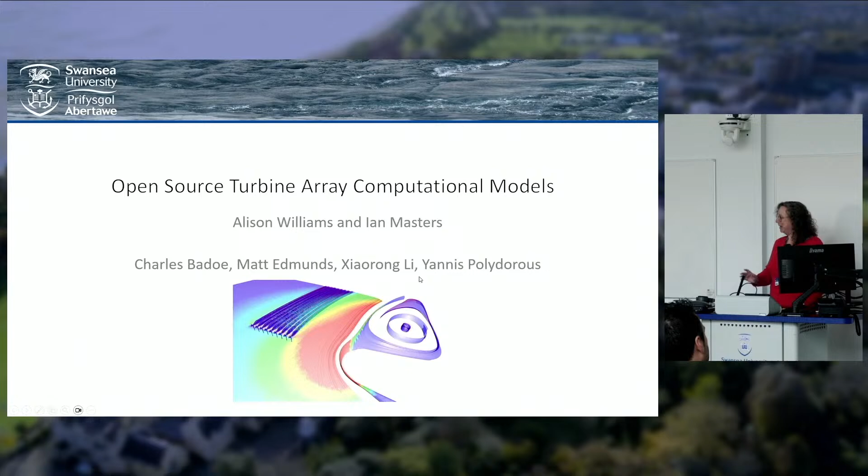We have spent quite a long time building this turbine array CFD tool. Here CFD means computational fluid dynamics, not the CFD you saw earlier in other presentations. Our motivation was to develop an efficient open source CFD tool that would predict horizontal axis turbine performance. We originally built it for tidal stream turbine devices, but subsequently applied it to wind turbines as well.

We know that the performance of a turbine depends on its characteristics, so we needed to implement that within our model. But we also wanted to represent the environmental characteristics, things like flow behavior and realistic flows, and embed the surrounding geometry, such as seabed bathymetry for tidal turbines, or the landform for onshore wind turbines. We needed to build that into our model as well.

We were thinking well ahead, wanting this model to work efficiently for arrays of turbines, not just a single turbine, so we could look at arrays and optimize their performance.

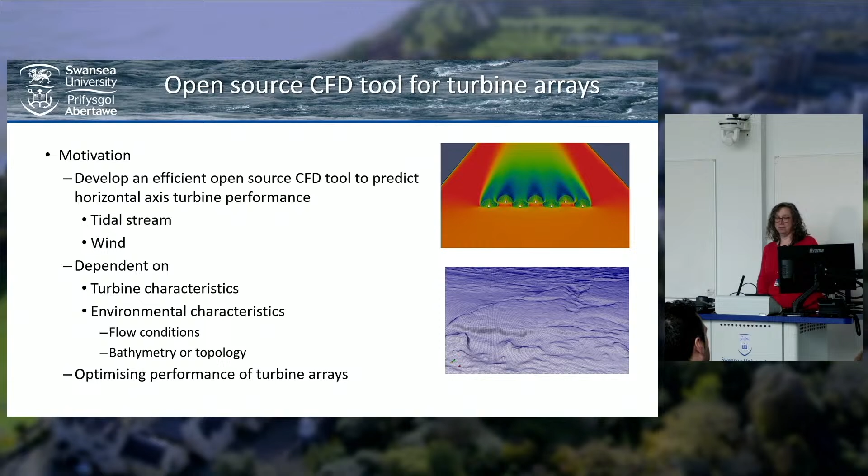So we spent a lot of time and ended up developing a model we've called Generalized Actuator Disk Computational Fluid Dynamics - a bit of a mouthful, so we've shortened it to GAD-CFD. This is an open source piece of software implemented in OpenFOAM.

The idea is that we represent the characteristics of the turbine by time averaging them over a disk with the same diameter as the turbine itself. This avoids having to represent the physical geometry of the turbine blades in our model, making it more efficient because we don't need to mesh around the blades - so we can have a simpler mesh that reduces computation time.

We also don't need to run it as a transient process. Since we're time averaging the behavior over quite large time scales, we can run it as a steady state problem and get an answer more quickly than with the complexity of transient analyses.

This tool has been implemented in OpenFOAM and is now available on our Swansea GitHub repository, from which the software can be downloaded. There's also training materials and some benchmark test cases. The release of the tool was put together as part of the Selkie project, which was an Interreg Ireland Wales funded project.

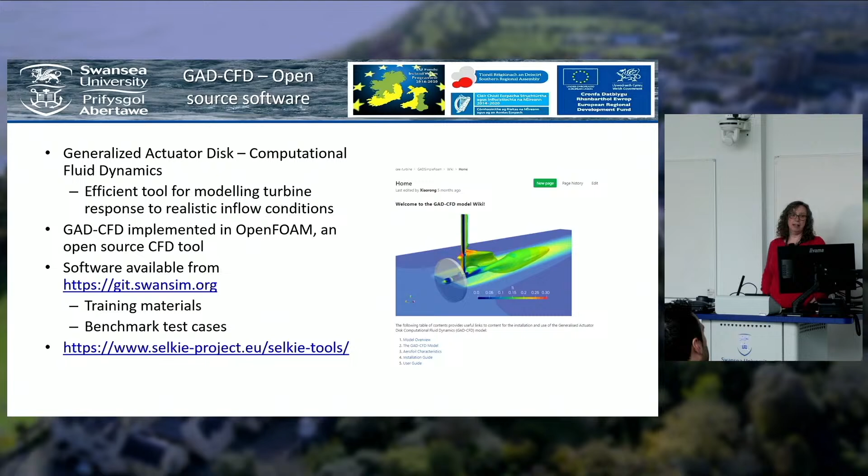In terms of data inputs, the model needs information about the rotor. We're trying to represent the rotor as effectively as possible, so we need to know how the blade characteristics vary along the radius, some information about the lift and drag for the particular blade, and what tip speed ratio it's operating at, etc.

We can also embed information about the support structure within the model, taking the geometry for the support structure and embedding that. And we need to know something about where this turbine, or these turbines, are operating.

So we need to know about velocities, turbulence intensities, and bathymetry if we're dealing with tidal turbines. If we're doing tank testing or wind tunnel testing, we can import the relevant dimensions as well.

Those are the inputs. For outputs, the model will predict results for each turbine being modelled, including power, thrust and torque coefficients, and information about the wake characteristics. So for a given set of operating parameters we can see how quickly we get wake recovery, and for arrays of turbines, how those wakes interact with turbines downstream of them.

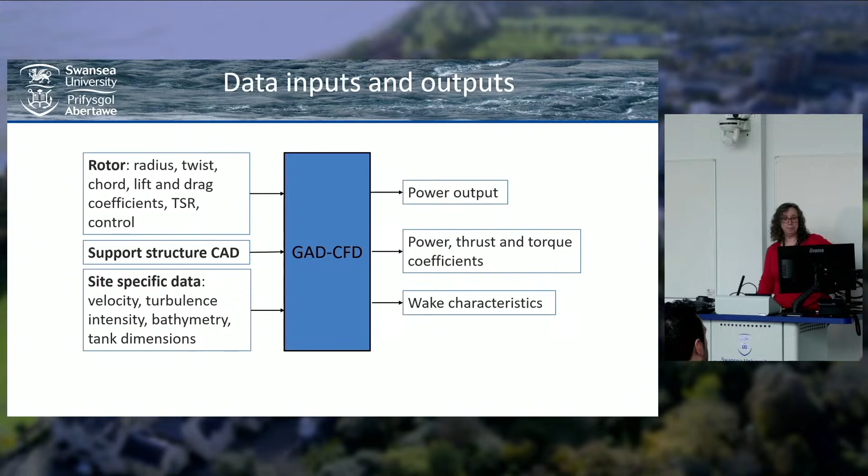As I said, it was originally designed for tidal stream turbines, and we did a lot of work testing and validating the model for single devices and arrays of devices. We've subsequently applied it to wind turbines and done some validation there too. We're fairly confident the model is behaving as it should - it gives good predictions of power, so looking at power or CP, power coefficients and thrust coefficients, we know it's behaving well. We've also looked at wake recovery and gained confidence that the model is accurately predicting wake recovery for these turbines.

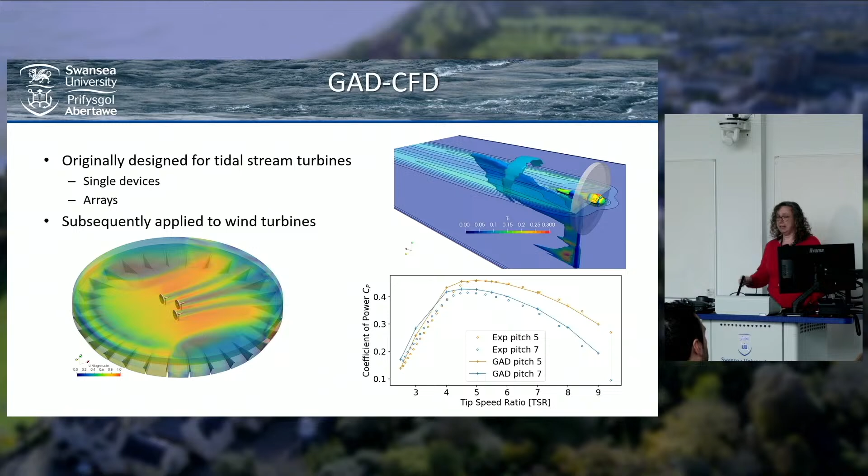So we moved on to looking at wind turbines. I've got an example here of an onshore wind turbine array - an array of 16 turbines sitting on a hillside. We've got the topology of the hillside built into the model, and the turbines are distributed as shown here.

We've got a fixed wind speed, coming in normal to the way the turbines are orientated in this model. All the turbines are orientated in the same way, and the wind is directed normal to them. That's just the way we've chosen to implement it - you could have them orientated at different angles.

When we've run that through the model, we can get a range of outputs. Over here on the graph, we've got some representation of the power produced by the individual turbines. This is a normalized power graph, relative to the turbine at the front. You can see we're getting quite a variation in the power predicted, depending on where those turbines are located.

In particular, we notice that the turbines located in this region seem to be behaving the best - they are producing the most power. Whereas when we move further downstream, we seem to get a drop-off in the amount of power predicted. The reason for that is those turbines are being affected by the wakes of the upstream turbines.

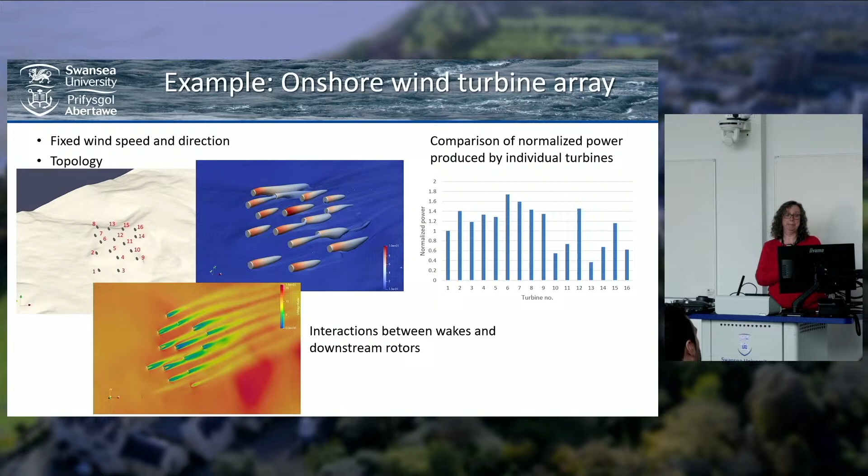I haven't shown you any examples of applying this to floating offshore wind because we haven't tried it yet. But we have confidence that it's behaving well for tidal turbines and onshore wind turbines, so we're fairly confident we could apply this method to floating offshore wind, because we know it has the ability to model turbines and their supporting structure over a range of flow characteristics.

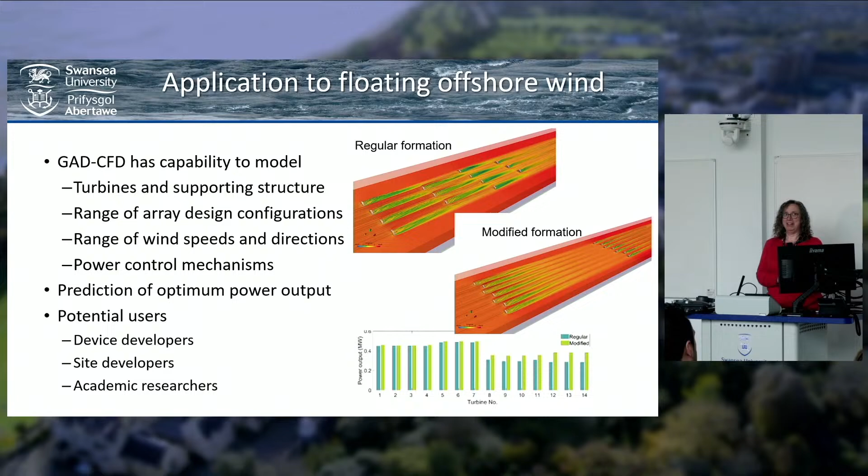We think the tool could be useful to site developers, device developers, academic researchers - anybody with an interest in this field who might want to arrange arrays of devices in order to get optimum output from their turbines. And that's where I'm going to finish. Any questions?

I can get it off, you can have it. Got a very quick one for you - are you looking for an offshore project to work on? Yes. Good answer. Great, thank you. Thanks so much.